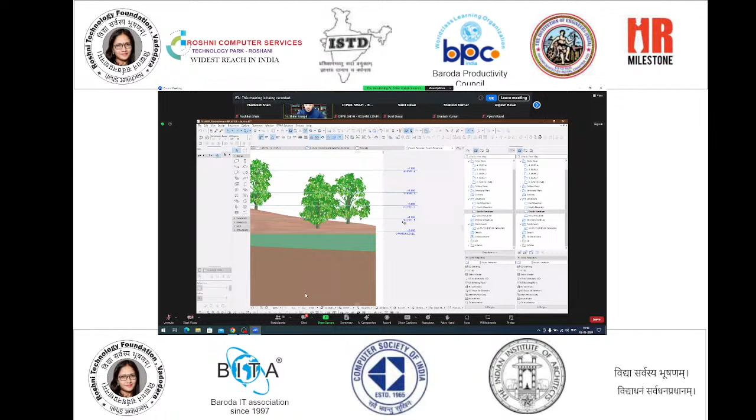So the first thing is when I select a tool, I'll get different properties to set up. This is where the slab part starts. I'm going for a wood floor right now as part of the model. And I'm going to give 100 mm height and also 100 mm from the floor plan. I can also define whether it is load bearing or non-load bearing, so I'll do that as well. I'll start with the rotated rectangle method of drafting.

So we created a slab. We will also check the same thing in 3D, and you can see there is a slab floating. Don't worry about the structural part of it because we are just initiating here. We are going to have the same thing in level 2, and in level 2 we will have this structure, so I'm going to model that as well.

So we have a room space. From the same space, I am going to add a couple of geometries to this. As you can see, there is a segment here, and also there is a segment here. And we can add another segment from here to here.

If we need any kind of references, the ArchiCAD software also lets us get that reference to work with. Now you can see it is not overlapping and it is not the right reference. Reference is something that we usually need so that our model gives a precise output. So you can see something that I can now remove. That is also there as part of the modeling aspect.

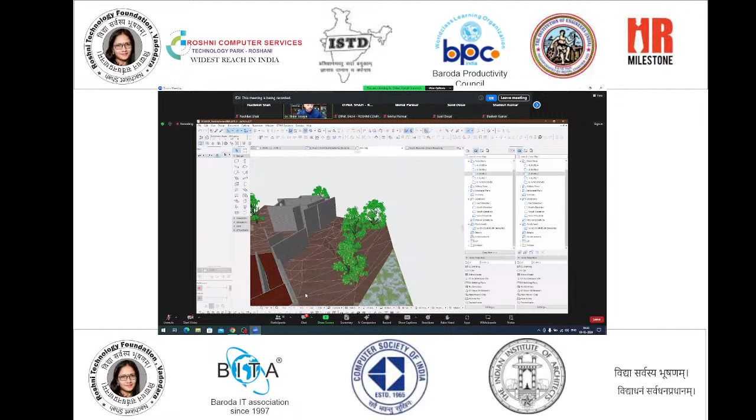Same thing, I can do it here as well, where these walls, which are made on level 2, I can either go completely into this floor itself, or I can take off the level reference and then take these walls and adjust them here as well. So here the advantage is that whether you work in 2D or in 3D, you are getting the update in the other place. That is one big advantage that we have here. So let's see now, yeah, that is also updated. As you can see, an update has happened, and this is what we have right now as part of the model.

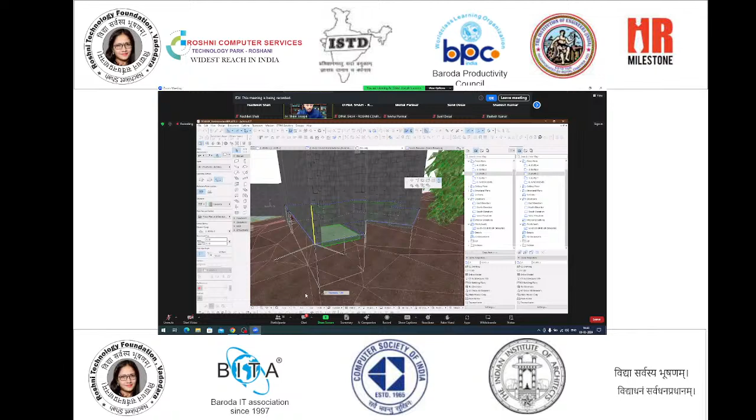Now, a small update I'm going to do: instead of having this as a wooden floor, I'm going to have a reinforced structure, or even a concrete one, and then I can edit directly if I need the slab thickness to go below earth. So that is also something I can easily do here.

Next thing is that on the ground floor, the bottommost level, there is a tool in ArchiCAD called the curtain wall tool. So I'm going to take the curtain wall tool and make that. The curtain wall tool helps us a lot in terms of making different types of facades. We can either go for a continuous one or a segmented one. So in the design, I'm going to take something like this. That would be better.

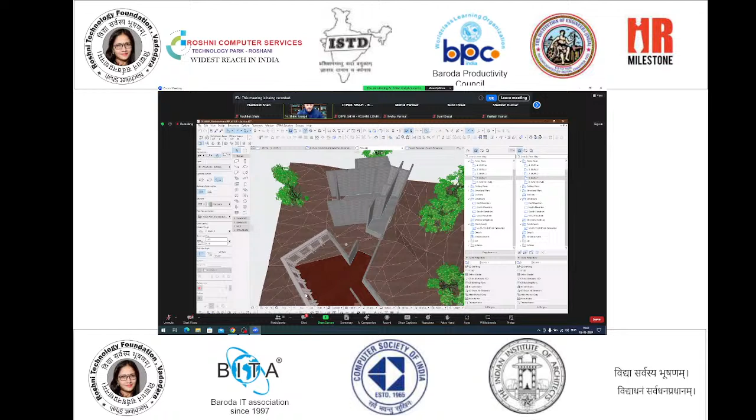So yeah, we have a curtain wall. That we can also set up. Right now I have kept it to 3 meters and we can see. And now you can see the site mesh is coming on top of things, right? Such things we can easily edit in ArchiCAD. For example, I can just select these two slabs here. There is a tool in ArchiCAD called Solid Element Operations. So I can keep this as the operator and this as the target. What this does is whatever is above gets cleaned, since I'm using upward extrusion.

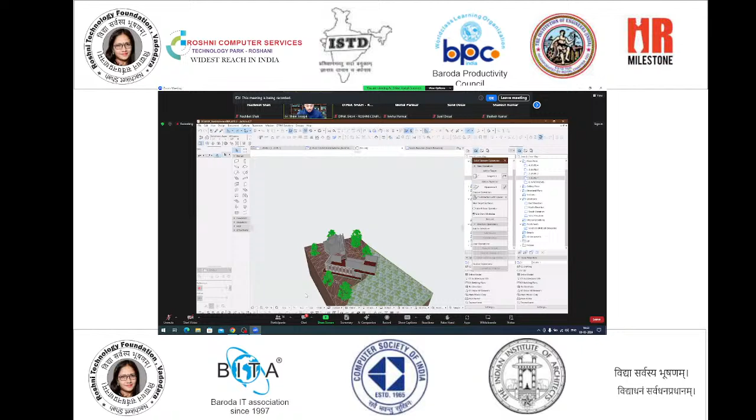So we will have a cleaner model with this. So this step, and then next thing, let's say I need to populate this with doors and windows. So what we can do is right now, if you see this curtain wall, it has a specific pattern. So I need to put a door on this. So instead of having this pattern, let's say if I need to have some other scheme for this. So I'm going to edit that.

So I'm going to take the base one, remove it. What I'm going to do is I'm going for a 2.1 base segment, and on the top of that I'm going for a 0.8 height. So there are two panels horizontally. I'll remove one and I'm going for a 1.2 meter width panel. Also, if I want to edit the panel size and everything, I have the option for customizing each and every part of this curtain wall. So that is an additional feature that we have.

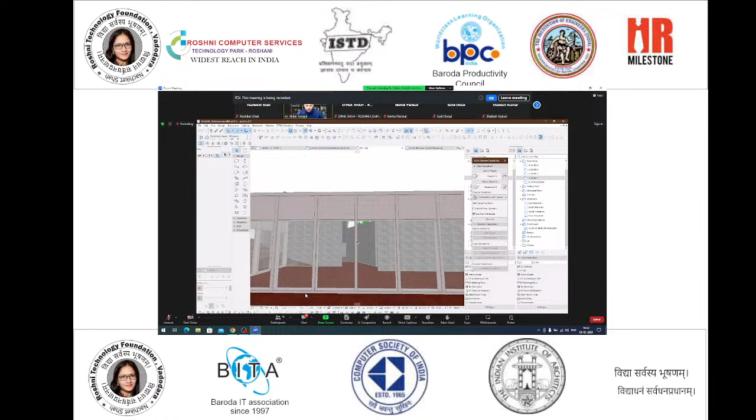And now you can see the curtain wall has been updated on the basis of how I have modeled it there. I'm going to elevate it up 0.1 because our slab is actually elevated a little bit up. So yeah, we have curtain wall also. Now, as part of the design, I have designed to have a sliding door for these two panels. So when we do that, this is one of the way of doing where we can just remove a mullion and then we can add a door completely here.

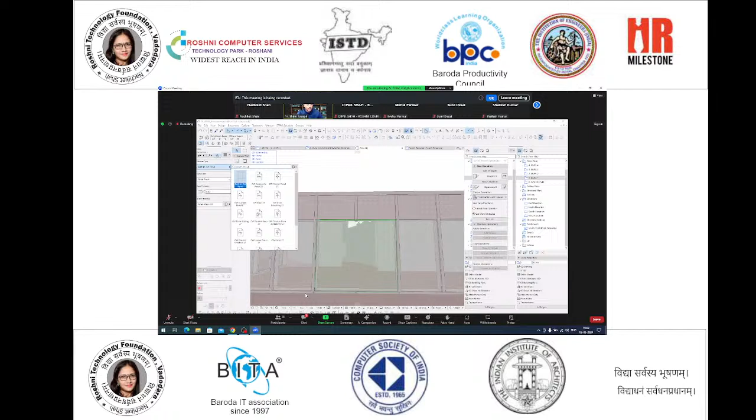So I'm going for a double sliding door. Let's say this, and then I'm going to open this as well. So you can see I have created easily a presentation, and also it is going to represent the same thing in the plan because we are using a sliding door, and you can see the representation already updated here.

Some of the other thing that we have is on the upper floor, we have a couple of doors. For this room, let's assume that the door is going to be here or here. So ArchiCAD also comes with a set of doors and windows. So what I'm going to use is I'm going to take one of them and I'm going to use this. We can also select and keep some of the elements as favorite. So you can see there are some tools that are already kept as favorite.

So I'm going to use a door of 0.9 by 2.1. So I'm going to use that here. Also another one here. Now this is going to be attached to this specific floor. So I'm going to use one more door, which is for toilet. I'm going for a smaller size. So I'm going to open it in this way. As you can see, I can control how it opens as well.

So I need to have another door here, which is folding and sliding. So that is a part of design that we have. So we will go to the library here. Like you can see, there is a large library already. In this, I'm going for a sliding and folding door, but I need a 2.5 meter width. This, and then I'm going to place that. Yeah, according to our sketch, it's almost correct.

Forgive me, there is a small delay. Yeah.

So I'm going to draw it from here and let's see how it is. Actually it's supposed to be from this side, but we can change the point anytime, there's no issue. You can see without a landing, I need to remove two more stairs. So instead of 20, I'm going for 18. I'll stop it here, add a landing from here to here, and then continue with the flight.

So you can see that one stair with the numbers and everything is added. Once we remove the image from the background, I think it will be easy. Now you can see I just deleted the image, but I'll get it back. So we have a guideline here which is disturbing us, we'll take it out, it's not required.

So that is, we have right now an element here, and I'm going to make this as well part of the model. I'm drawing on the top. Why? Because I have decided to cut this instead of doing that. So if you want to do such kind of activities, that is also possible, we just have to define which axis.

Now we have two different walls in this. Also there is a stair which is going up, so I'll take the stair tool. Also I need to define what actually this dimension is, so I'm going to check that as well. So it is 1.82 width, and it is going to start from level 1 to level 2.

And I'm going for adjusting the height, 1.82, sorry, 1.82. We'll confirm it, yeah, so 1.8, yes.

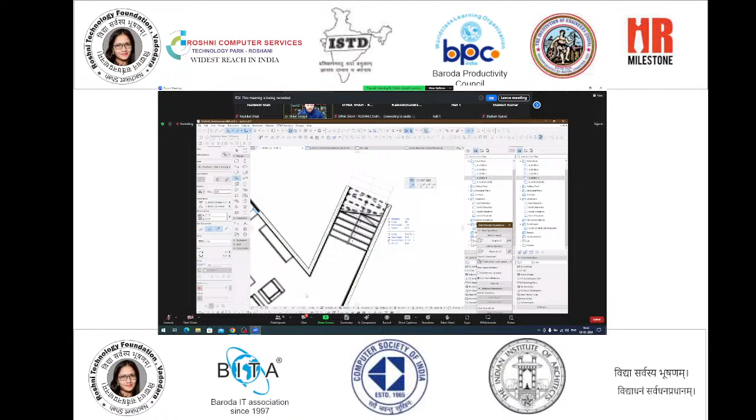So here it is going for 10 steps to climb to that level. Let's see it there and try to edit it in 3D also, that's how we will try to change this. So let's check what we have done. Here you can see we have created a straight flight, and there's actually two landings happening, which we will edit later. And here there is an additional stair that is happening, which is connecting.

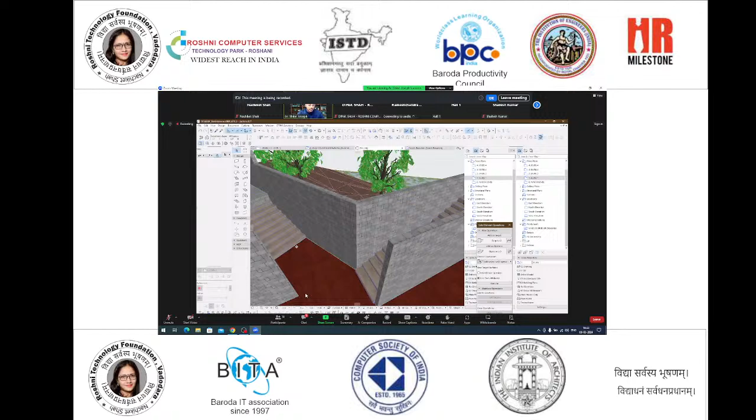But in this design, imagine I am deciding, instead of 10 numbers, I'm going for 8 numbers. You can see it updates and corrects the model accordingly. And we'll get back to the floor plan. So that's how it is to create models and designs easily. We're going to edit this also, just in case we don't run into any errors here, but we are avoiding that as much as possible because we are working with a time limit.

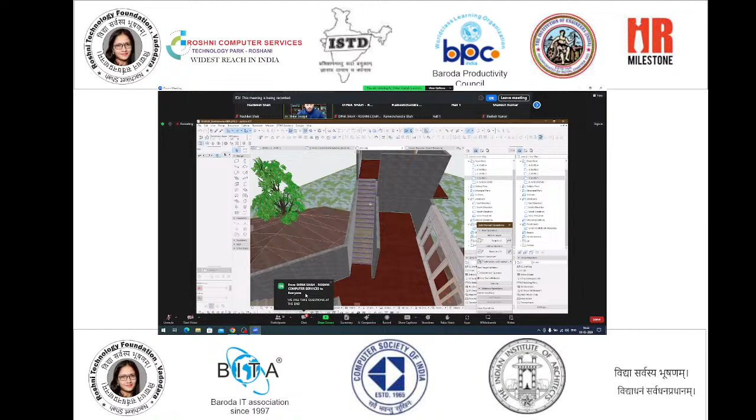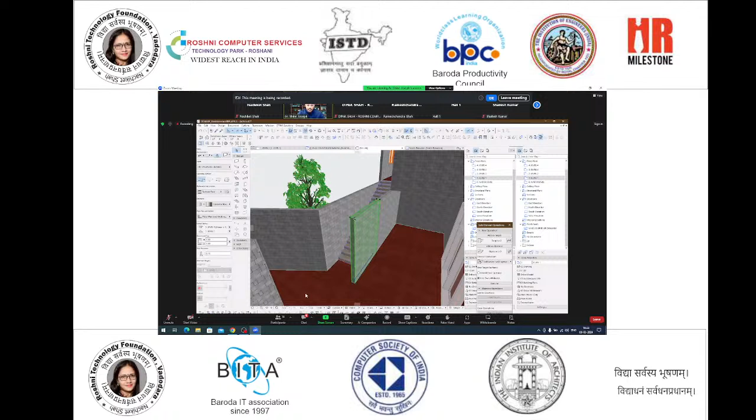Yes, so this will be a shorter and better stair that we have. Now, as part of the design, let's say I don't want this wall to be straight, I want it to be cut into two pieces, where that is something that's part of the design, we can do that. Most of the design that we do comes when we see things in 3D, and then we decide, okay, this is not right, I can do something else instead. So I'm going to reduce this, and you can see, yeah, it looks much better. So that we have done.

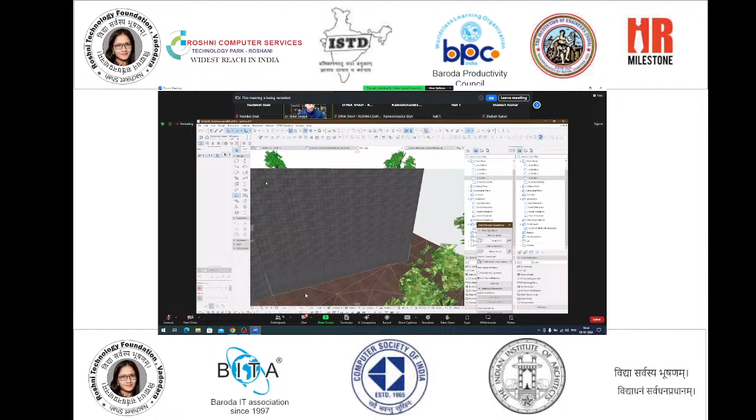Also, as part of the design, I don't want a big huge wall, I have a water body on the side, I don't want it to be like this, I want it to be much better. I want to have a circular opening instead, so that is also something we can have. I'm going for a 1 meter diameter circle, and I'm going to place two of them, so I can place one and then make a copy and place the other, that's also fine. I found that this is small, so I'm going for 1.5 meter, and you can see it looks much better than the previous design.

So as part of the major structure, sorry, the major frame of the building is kind of done.

So what we will do is we will start with the roof. For this part, I'm going to decide to have a roof that is sloping towards two sides. So we are going for the roof tool in ArchiCAD. There is also something that does the calculation by itself.

So I'll go for two side sloping, and then I'll take the rotated rectangle method. I'm going to take this as the reference to create that. You can see it automatically created a roof in plan. Let us go to 3D and see how it is.

So I have done the projected part, and you can see I have created a pretty looking roof. We can adjust the slope and everything. Right now it is going for 30 degrees. If I wanted to have 27, that would be better, I feel. So I have changed the angle as well, but this seems pretty simple.

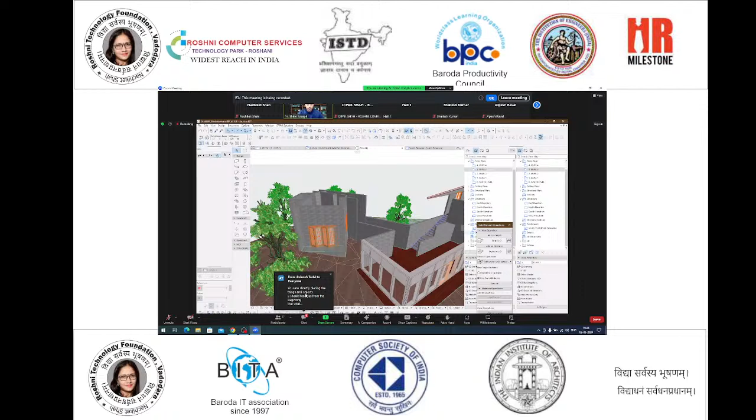So we will go for one more of the same for level one, and then we are going to adjust and create a complex roof for this. For this room, I need to see the reference which is on top. So I'm going to refer to the third floor, and you can see right now I can see the third floor easily here. So the reference I'll be taking will be from here. Okay, let's take it from here.

And I'm going to use this as a reference here. Or I can even take this part of it and create the model. So that is also an option that we have. It depends on us how we want to do that. It's part of the design, so we can improve it anytime.

So I'm going to place it. It is telling me that it's on top of this floor, so we'll be able to see a roof. Right now it is using this, but I think it would be better to have the roof in the other direction instead of this. So let's have the roof removed. But I think you're getting the idea of how we are getting into the design, the nitty-gritty of this design, and how easily we can edit it.

So I'll go back to the same method. I'm taking a couple of reference lines so that it will not make any errors. So I'm going to place it till here, continue, and then let's see in 3D how it is. Yes, we have created the roof.

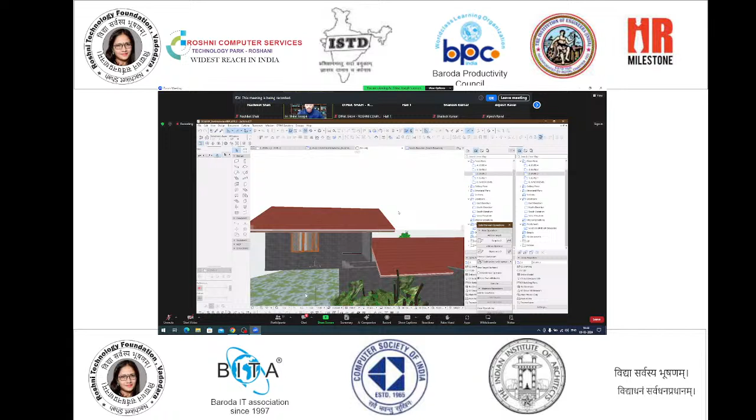So now this wall, as you can see, part of the design, it's not right to have it. So we need to have another wall here. You can either stretch the wall or create a new wall altogether on top. There are different ways and multiple ways of achieving the same goal. So that is something that we have here. We can see that has been created. I'm not going to close this right now, let's see what we can do as part of the design.

Now the most important thing is that when we work with a complex roof, for example for this, if I need to build a sloping roof, it is going to be really difficult to model a roof for such kinds of shapes. So what we are going to do is make it a little bit easier and not so complex. We will not waste our time making the calculation, we'll let the software decide how it is. So we are going for a complex one.

And I'm going to just draw the profile of the roof. So it goes here, here, here, here, and it's a small piece. And then I'm going to take it till here. So we need to do a little bit of adjustment for the roof, and I'll get back to the first point. Now it has created a roof. I think you'll be wondering how it is going to look in practice, so let's see.

So you can see we have created a roof here, which is complex. What I'm going to do right now is, like the previous design, lift it up to 3 meters - right now it is at 2 meters. And you can also see the wall is going up.

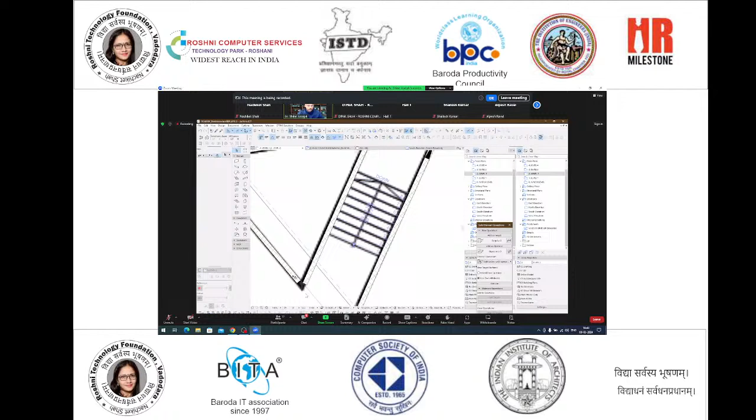I'm going to add another wall here. As you can see, it's taken from a very basic image and there is a time limit, so I'm not focusing on the precision of it, but we can edit and change anytime. I'm considering this a conceptual stage of the project, and right now all these changes we can easily get back and adjust.

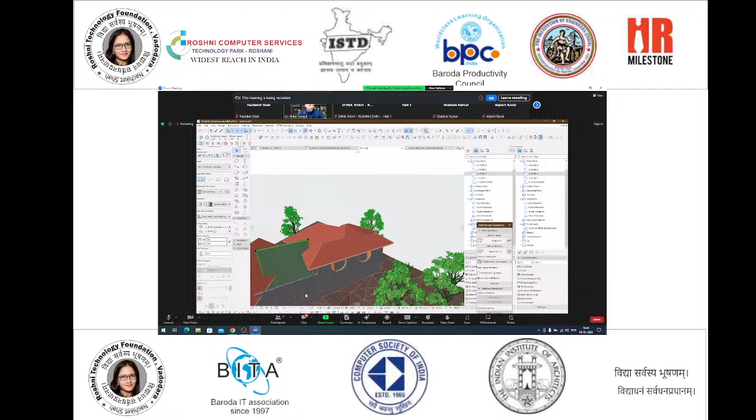So this is going up, and I need to fit it to this. When we speak about any of these softwares, one of the things you should know is there's a language called parametric language where it understands where it is linking to - so the software knows that part of it.

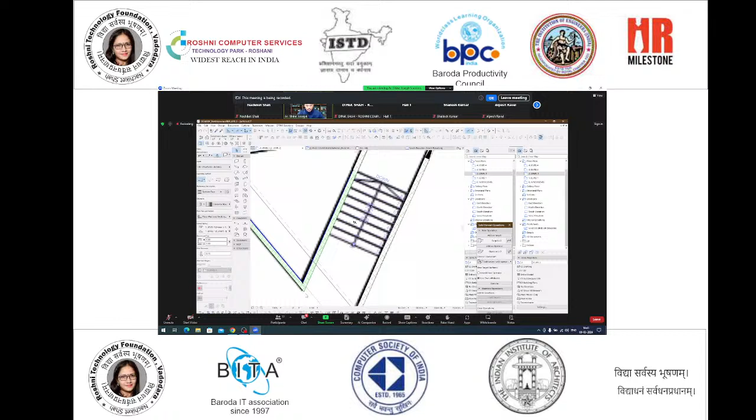So you can see in this area there is no roof, so if I need to add that there's also an option to do that. When we have this plus symbol, similar to how we saw it before, I'm going to take this part of the roof, and you can see in plan and also in 3D it is going to be updated - so we can do that.

Right now I'm not going to keep it. We can do however we want to have it - even if you want a slope or a flat roof, we can do that. So this is what we have created so far.

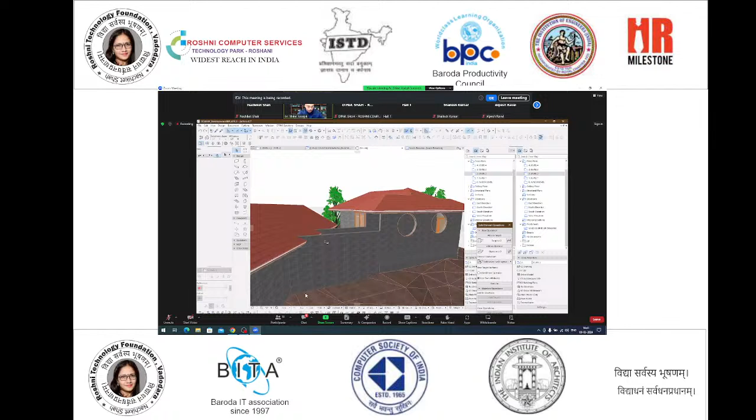As part of the design, this is an open area, so I'm going to take these two walls and keep the wall height only till level 2. And this wall I'm going to take only till here. You can see I've created a little bit of detail here.

When it comes to adding furnitures and details, that is something that gives life to our drawings or to our design. Right now I have decided the kitchen will have a cooktop, a sink, a tall cabinet, and a fridge - so this is the pattern I'm going to use.

This is a very small space, so I'm going to take it a little bit to this side. I'm going to improve the design over the period of time. So the first object I'll be using is the kitchen object.

You can see there is a large library, like I mentioned before - for furnishing, windows, building structures, under furnishing, appliances, bathroom accessories, beds, chairs. The library is huge, I don't have to worry about whether an item is there or not because most of the things we need are already there. So if I go for just kitchen items, I'll get it directly here.

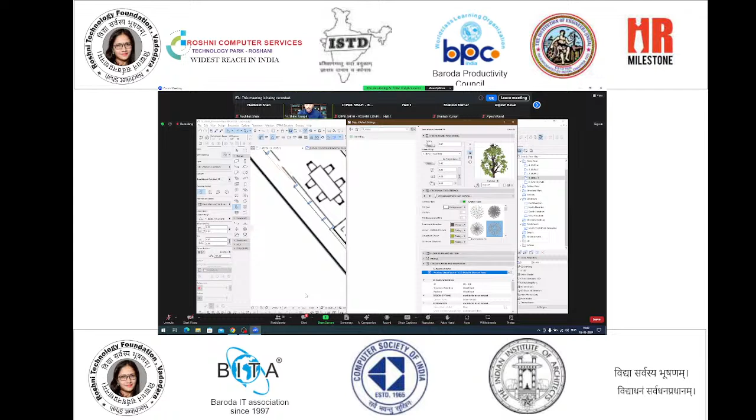I'm going for a kitchen layout - I'm going for a U shape. Here I can set up certain dimensions, like this is right now 2 feet high, 0.6 meter. Instead of that, if I need a different dimension, I can set it up.

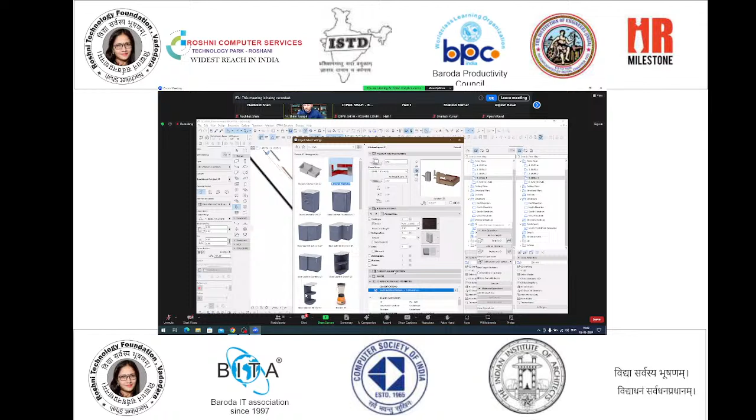So I need one tall cabinet and one wall cabinet - multiple properties they have. I'm going to avoid dishwashers, washers, and ovens and such details, so I can remove those. Once it's done, I'll give OK, and then place it randomly - you can see it comes with this. I'm going to place it here, do a little bit of adjustment here and there, and I need it from this element.

And this is going to be somewhere here. Yeah, this is going to be good. And then I'm taking this. So what you are seeing is a wall cabinet. So I'm running it all around. I'm going to stop it here. So this was our tall cabinet. So I'll place it somewhere here. Right now, I'm not worried about the position. I'll approximately keep it so that we can showcase how it is coming.

And then I have a refrigerator. So the refrigerator right now is using a specific standard. So I'm going to readjust. This parametric property is that I can easily adjust, so that is something that you have to observe when I'm doing it here. So the cooktop, according to the design, is here. And also there is a sink which is going to come here. So right now this does not have any windows. So I think adding a window would be good for this location.

Now we'll do the edits in 3D because we'll be able to see much better there. So let's see what window we have placed. So here I'm using an asymmetric window itself. So this is how it is right now. But if I wanted to have a symmetric or uniform character, it is going to take place according to how we design. So like I mentioned, the parametric aspect, it's in your hand. So we can easily do that. So right now, if I go for a mirrored one, it is going to be mirrored for the first element. So the same thing is going to reflect, and you can see it has been updated here immediately.

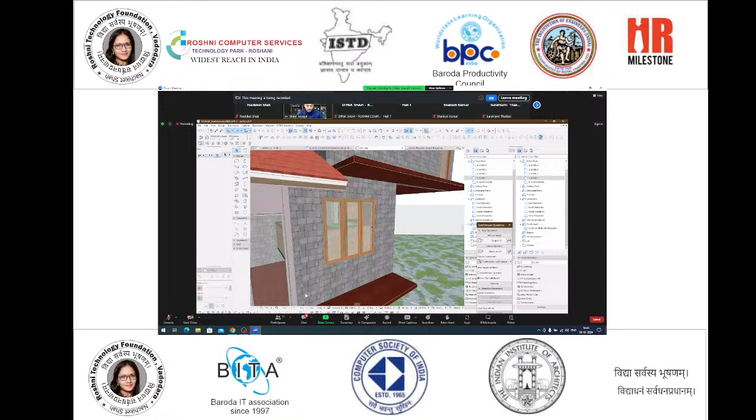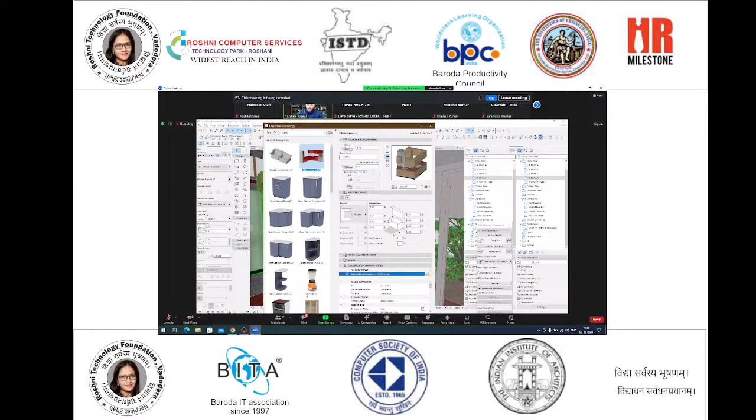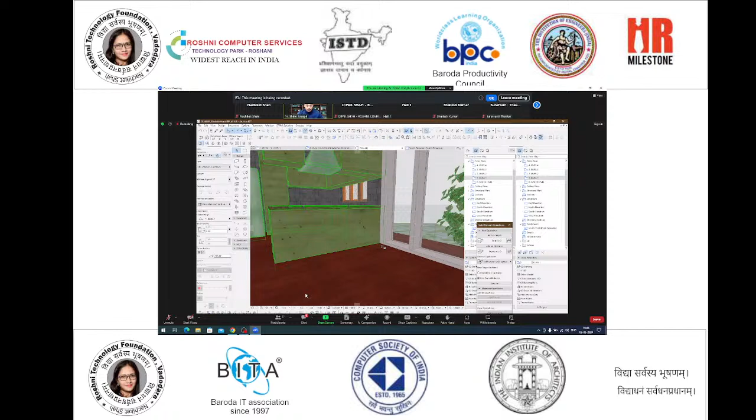I'm going to the 3D and I'm going to see where it is. So right now it is placed a little bit up because we have connected to a different floor. So that's what I was talking about, the parametric character. We need to define exactly where it is supposed to be. So if this floor is supposed to be at level 1, mention it level 1. And if it has a specific height, you mention that. So I think it went a bit low. It should be... We'll edit it directly here. And 0.1 now. So yeah, we have added it there. So there are no issues.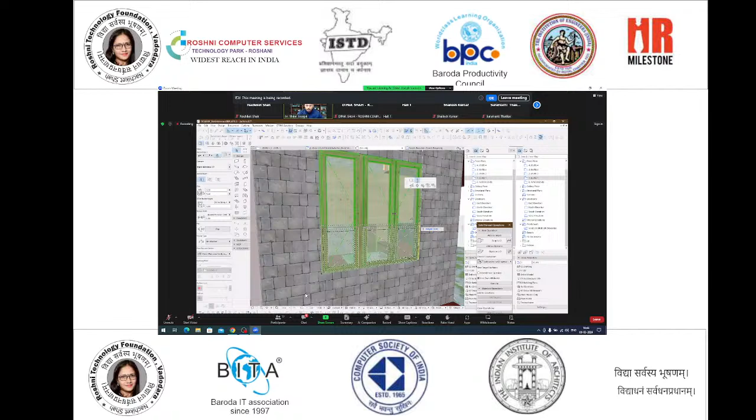Yes. And then there is a wall cabinet coming here. So I'm not looking for a really tall window. I'm just looking for a small window, which is going to just help us glimpse outside. So yeah, we have that as well. So this is what we have created. Right now, there is a hood that is going up. If we don't need that, we can remove it. So I won't be spending much time on this particular topic. So it's the parametric aspect of it, like I mentioned, I'm controlling that however I want.

Similar way, if I'm going for a dining table, I can decide whether I want it on both the sides or not. So I'm going to place it. I'm going to take it from here, adjust it to this. And you can see it's already a 6-seater. So if I stretch it, it will do the calculation by itself. And depending on the space availability, it will give you how many seats you can have.

Similar to that, we have a sofa set we are going to add here. So we will search for sofa. And then in this, like you can see, we can take a sofa model. And I'm going to place this. So I'll give 0.1. Also, this has been elevated a little extra. So I'm going to rotate this 180 degrees. And then I'll place it here. Also, I'm going to place another one here. Like I mentioned about the parametric character, if I make it small, yeah, right now we have it.

We are going to go for a coffee table. So let's see, you can see there are multiple models already there. I'm just going to take one of these and then make sure it is on the right level. And then we are going to place it. Yes, we have 0.85 by 0.85. But anyway, we can edit it and update it at any stage. Also, I'm going for a single seater sofa this time. Let's see in the library, yeah, something like this I'll use. Yeah, this would be much better. So don't worry about the appearance or material or anything. That is also something that we will be looking at later.

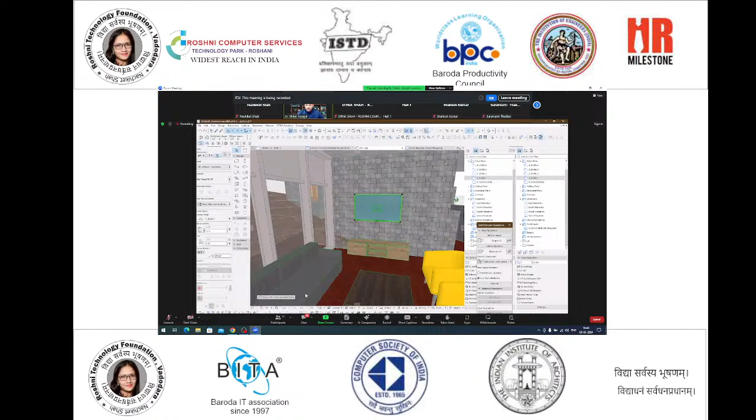If I need to have a specific width, like if I'm going for a 5 feet TV or 60-inch TV, we can do that according to how we want it. So I'm going for 1.5 meter, a little bigger TV. I can edit it in 3D also. I can assign it depending on the model. Yeah, it's in our hand. We can just do it on the basis of axis. Right now, because our building has a slant, I think it is better to move it in plan itself.

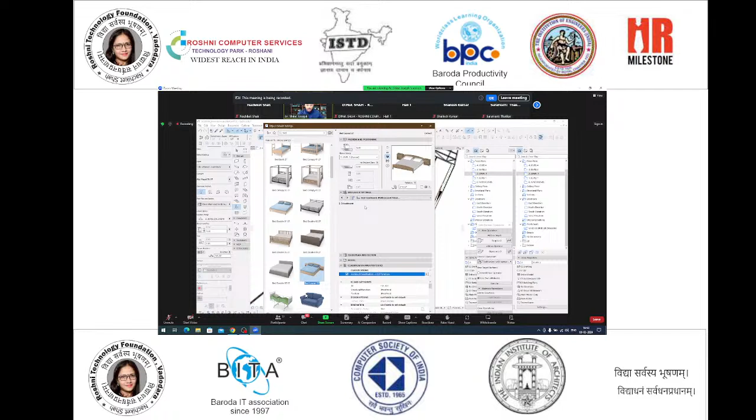We'll go to the next level where we have a bed. So we'll populate that also first, because we have almost 18 minutes more. So we will go with a bed that has a side table. I think something like this would be better. So I'll go for adding certain details. I'll add a pillow. I'll control the headboard to be something like this. And once I place it, I can just arrange where I want it. And you can see I have a bed. I can adjust the size of anything, there is no issue for that. So I'll keep it to that.

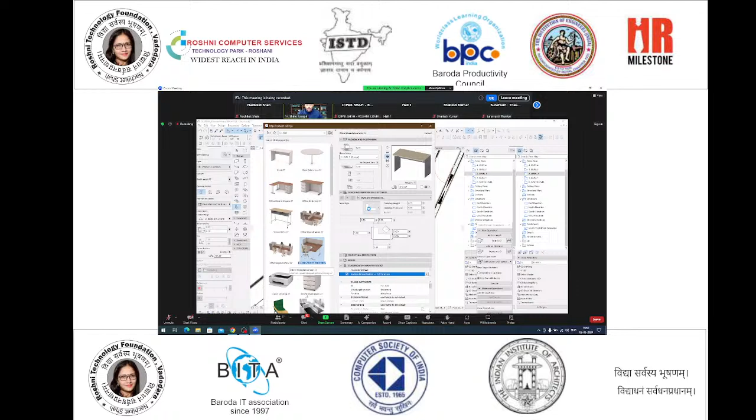So now I'll go for a study table. So we'll go for a desk, and then we'll take this. We'll not worry about a chair. Okay, if we want to, we can do that. We can set up what type of shape we want. So we'll get a model like this. And if you don't want the front panels or anything, we have the option to remove that. And we are immediately getting the result.

So this helps us do the model and documentation detail. As you can see, when I'm doing the model, I'm getting the 2D, the 3D and all the details directly. So that is a main advantage. I'm going to put the chair a little inside so that it will be safe for the person to walk. Also, I'll add a wardrobe. There is again a large library of wardrobes here. Okay, typed wrong. Yeah, so in this, you can select something. I'm taking something like this. I'll place this, rotate it, and then I'm going to place it here.

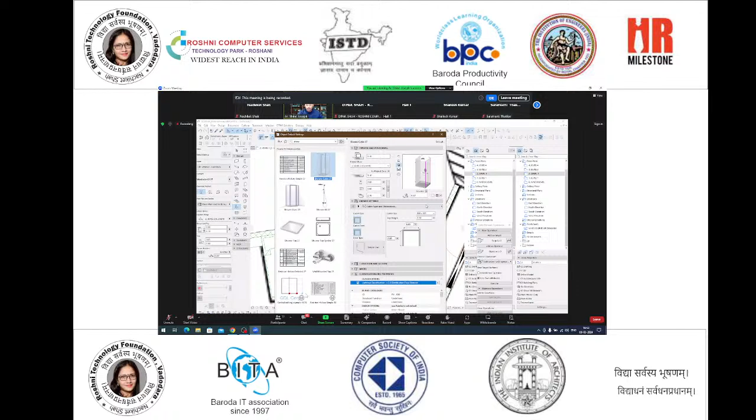So we are almost done with our furniture. So we have something like a shower. We can go for a shower and then select the type that we are looking for. You can see it gives a preview of what we are trying to do. So this is something I'll be using, and then I'll be placing this.

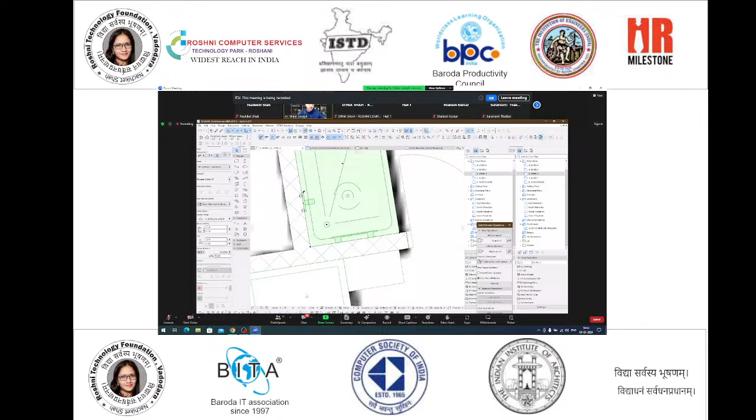Again, it comes with the pipe junction positions, so we can easily do the plumbing drawings directly here. Like you can see, this is where the connection is. But if I want the connection to be somewhere on this side, you can see it automatically adjusted that aspect of it. So it helps us. If you're saying this pipe has to come out, I can just take the pipe outside easily and start doing the MEP model as well.

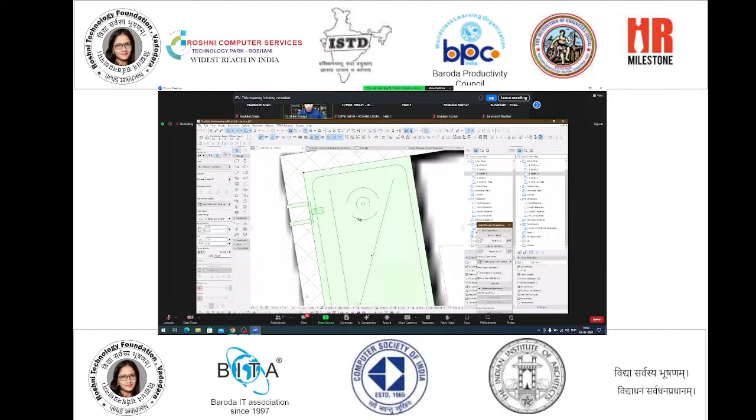So to finish that, we will get some additional details like WC. WC is also something that is really nice to edit. You can go for a floor mount or a wall mount. You can control what type of flush you're looking for. It automatically gives you the update. So this is also an MEP element.

I'm not worried about the technical aspect of this toilet; as you know, there will be a lot of issues if the model is not right or things like that. But that is not what I'm focusing on right now. I'm trying to create a model and show you how easily we can get the data. So I'm going for this, small changes here and there. Yeah, so now it is a clean finish there. And so this part is also done.

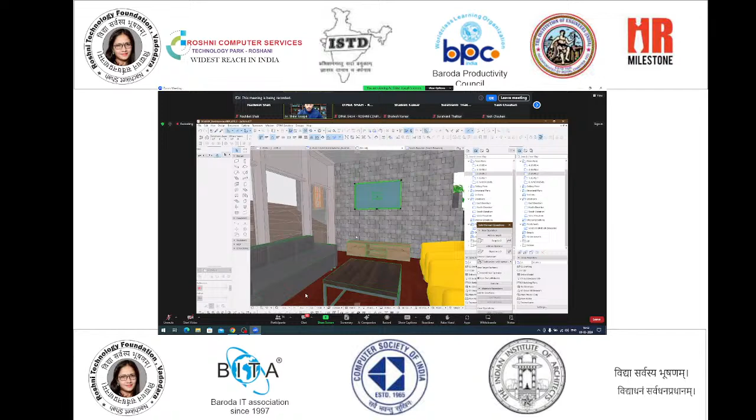So here you can see there is a little different type of stair that we have. So I'm going to go to 3D and check how much height there is in that place, and then we'll try to create a stair specific to that height. So right now it is going a bit up. So it's almost 1.2 meter. So like I mentioned, it is really easy to create even a weird shaped staircase.

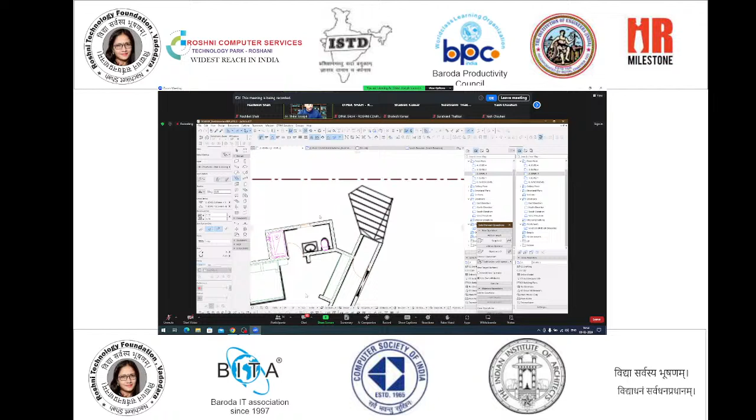So what I'll do is go for a flexible height, not linked. So I'm going for 1.2 meter, and then width, I think I should go for 1.2. Let's see with the 1.2. I'm going for top to bottom this time because it is easy for me to draft from here to outside. And I need to change the direction. And so now I have a stair. So you can see I created a stair.

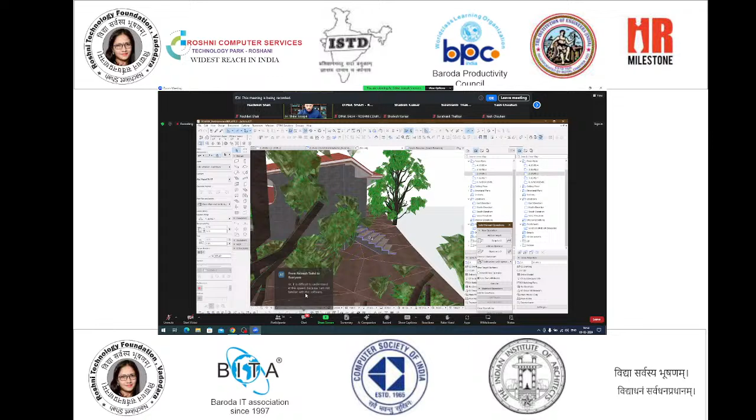Now I am changing the profile to adjust it, because as part of the site, there were contours that were making some issues. And you can see even the profile can be adjusted easily. So if I get back to 3D, I may have to adjust the height. So you can see it is right now merging with the site. So there was a little bit of height that I was supposed to make. So yes, we have the stair that is coming.

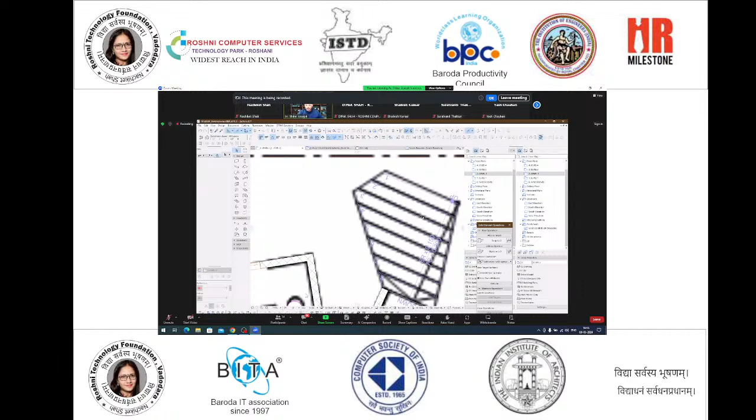Again, you can make it curvilinear, you can make it much more fancy and do it easily. And you can see there is also numbering, and the riser height and everything is already done for you. So we have this floor as well. On the topmost floor, we have only 2, 3 furnitures. We'll finish that as well.

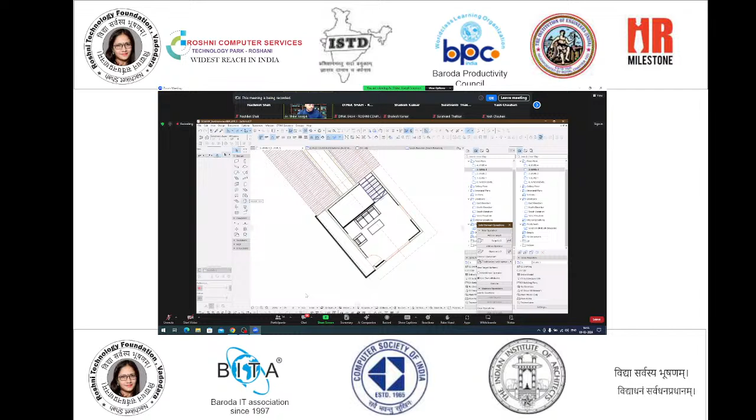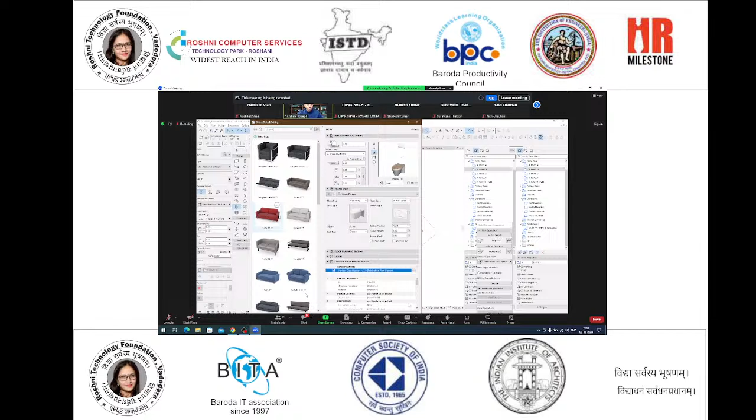So I'll take the tool here, and then in this, I'm going to type sofa again. Again, copy from the previous one, but here I'm going for a sofa set itself. So there is a sofa layout where I'm going to keep it on one side, but not on this side. Something like this, it comes with a table as well. So you can see, this is how it is. There is a little bit of rotation required. Yeah, good.

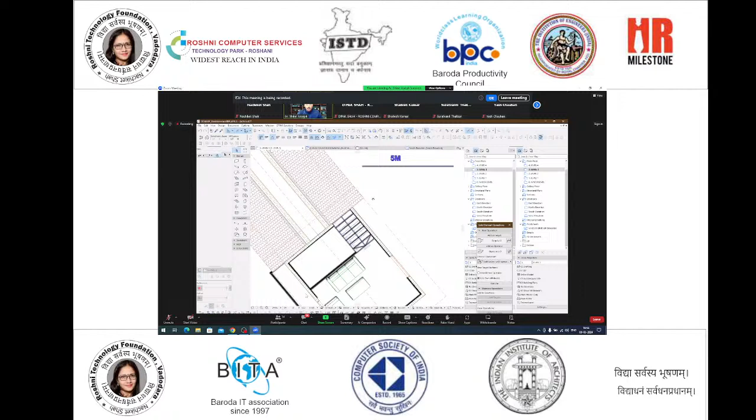So that is also something we have. We have doors, windows, and everything. If I want, I can just add a window here as well, to let the house breathe. So we have almost everything done in terms of our model. The only thing is the structural aspect of it. There is the possibility of importing structural details. Otherwise, we can completely create them.

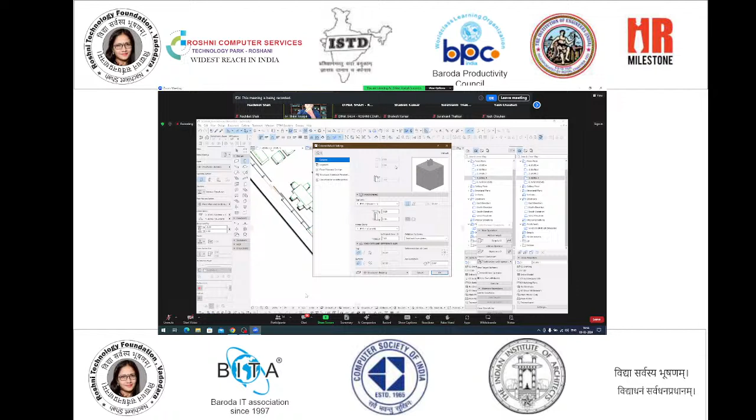So what I'm going to do is make a column. I go to the column tool in the settings. So right now, this is something that I'm going to look at. Instead of a simple column, I need a base that is standing in the ground. It's just for the project I'm doing. And on the top of that, I'm using an I section. I'm using a flexible height right now. So this is what you're seeing.

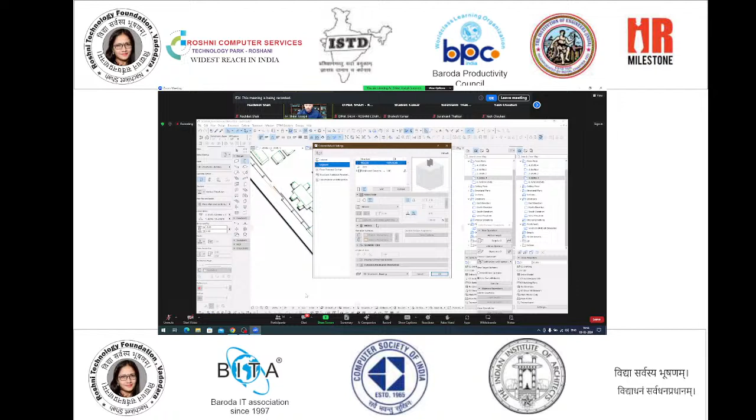So the base is an RCC material. What we have is the base. We'll take it as rectangular, and I'm going for a reinforced structural. So you can see the base is reinforced structural. You can add the plate and all the detail here, but I'm not going completely into this. So this is a specific cross section, which can again be customized and detailed. I'm going to give load bearing as the structural property detail.

And I'm going to add this in this level itself because I need to support those two parts of the building. I'll add 4 columns probably there, but I need a reference of level 2 or level 3. Level 3 would be better. We can see easily here.

So you can see that there is a projection of a wall. So this is where it would be preferable to add. So I'll take the column here, and you can see it comes with all these details. So I'm going to take it to this, and I'll give it a rotation. And you can see the column is right now sitting. Don't worry about the sizes or everything. We can customize even this aspect of it, like you mentioned.

In this, we have the option of going through each and every detail of it. Like it is using an I section of specific detail. Again, we can do that. So I'm using one here. I'll also add another one. As you can see, I'm looking at the reference of what is there below and working with the same. So I'm going to make 2 more.

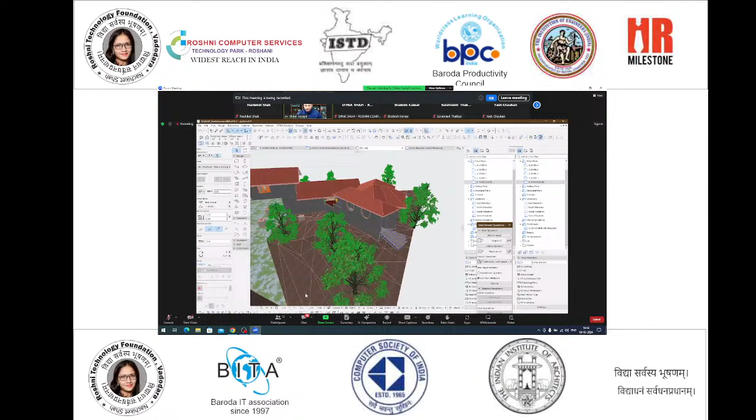I'll take from here and I'll place it somewhere here. Or let's say I need to multiply. So I'm going for the distribute option. I'm going to have two copies of this. So when I start from this to this, it is automatically distributing between these two elements. So I'm going to keep it somewhere here. Now, if I get back to 3D, this is what we have. We have a couple of structures here.

So now either in 3D or 2D, if we have a structural engineer, always better, we can do the customization, and we can see it starts to form how the building is going to function. So this is the column part of it. If you want to specifically look into the beam aspect of it, that is also possible. When we have the column, we can again go for a beam. We can customize if it's your I section or a completely different item itself. We can do that also.

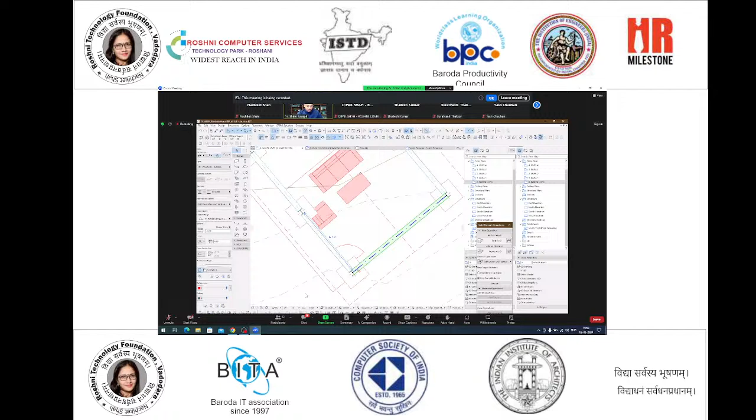So I'm going for this. I don't want the reference, so I'm pushing the reference back. So I'm going to take it here. And I'm going to take another one to this. And it's equal. You can also multiply like the first method that I used. It's up to us how we want to do that. It will help us accordingly. So I'm going to place two members here and here. I'm going to take this. Just keep one here and one more here.

So I won't be going much into it. There is a different model similar to this project that has been done. I think it will be easy for me to show directly here. So like you are seeing, it is more like a plinth beam that we have created. So I'm going to elevate it to somewhere here. And also we can keep a copy here. So it is going to support. So similar to that, we can again easily do a complete modeling of the same.

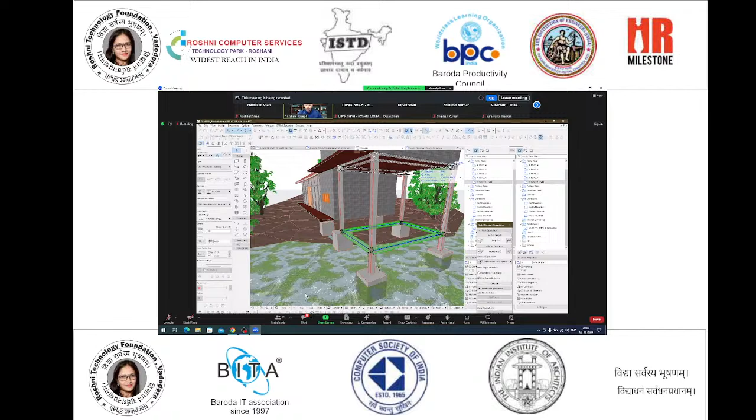So like you are seeing this column beam structure, if I want to work segment-wise, that is also possible. So all the columns in this project are already assigned as load bearing members, like you can see. Also, all the beams are specified as load bearing. If it is not there, we can also do that. This roof needs to be load bearing. So that is also something that we have to assign. So here it is, like you can see, it is a load bearing member. There is also an option to add additional detail.

So far what you're seeing is a complete model, even detailing the structure and the architectural interior part of it. Now let's say we make a couple of drawings of this. So when we have a project with multiple floors already created, now what I'm going to do is... Joseph, I'd like to interrupt you.

See, basically, so far, in order to do things faster rather than redrawing it, he has taken a raster image of some plan. And on that raster image, he built the 2D. And while he is building the 2D, it is creating 3D along with it. And placing furniture, kitchen components, or maybe your WC, everything is just parametric and you just have to place, stretch and fit it into the available space. Yes. So this is quite easy, and after creating the building, he added the structural components also.

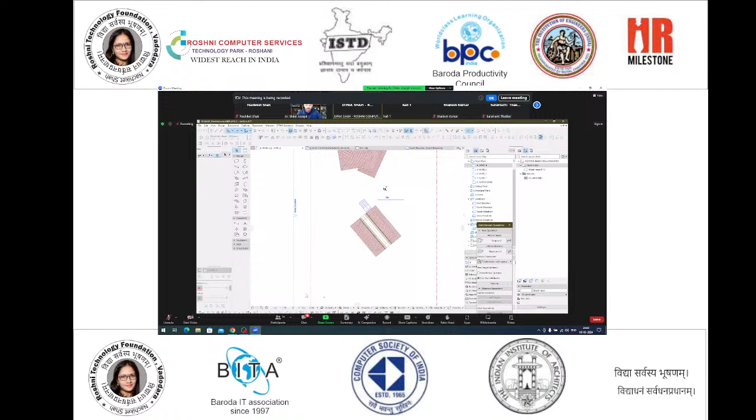Wait for another 5 minutes and have a look at how drawings are created. You can finish it off quickly, we'll leave maybe another 5 to 10 minutes. So we already have some elements prepared.

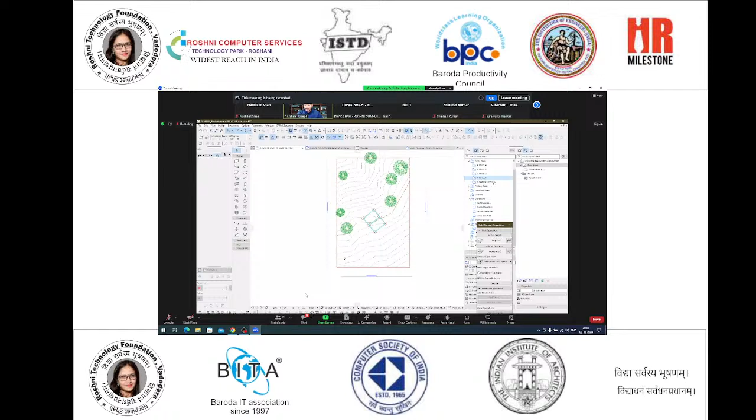You can see there is a ground floor drawing. As part of documentation, I'll add the levels as well. I'm taking the level tool and I'll just click. It's telling me it is plus 1.6 from the reference, and our reference is the water level, which is 0, and then it is going.

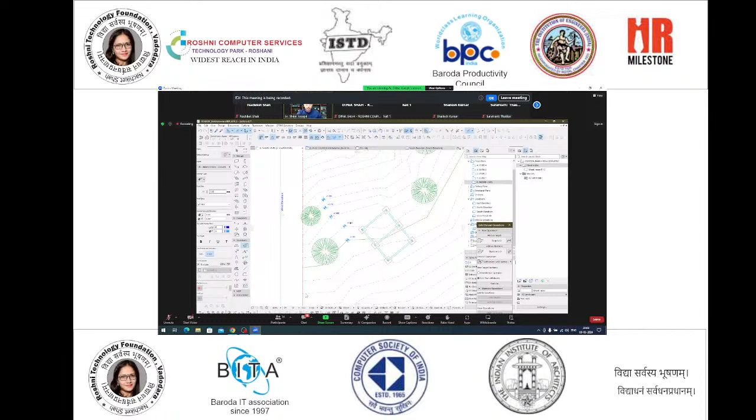Let me explain. If I click here, it's asking minus 0.2, this is 0.1, so 0.4, 0.7 - the contours are climbing up. So I'm clicking on it and it's giving me the volume back, and this is the water area we have. From that reference, we prepared the model. So when I click here, I'm automatically getting the height.

Let's consider the same thing here. You can see this is 3.1 meters from the base. Also, if you want to specify the roof height, that's also possible.

We can do that. As part of documentation, I'll do one automatic dimensioning only for this wall. I'm going to select all the walls here, specifically just the wall for now. There are different methods of doing this, and all these walls are what I'm going to use for documentation.

I'll take annotation - there is automatic dimensioning, I'll use the exterior dimension. I'll place it on all four sides and take it aligned to this axis because it will be easy for me to get the dimensions here. You can see it gives almost all the dimensions here. So that's one way of doing it.

I think it would be better to show it for a smaller scale of space like this, it would be much more efficient to show. I'll just take the walls of this. When we have so many elements here and want to focus on walls, there are again different methods of doing that.

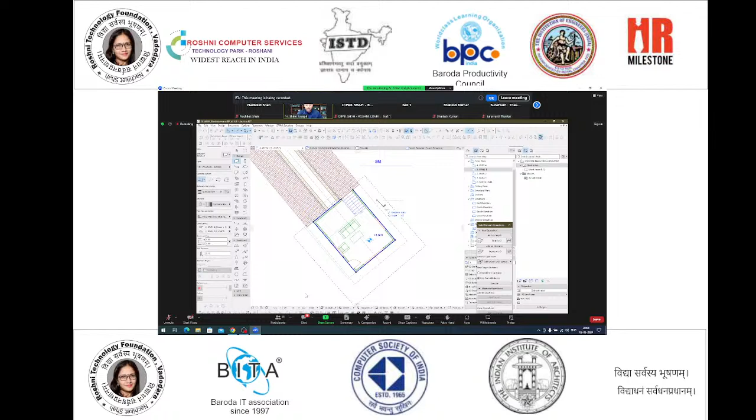I'll just take all the walls in this area, and now under document there is automatic dimensioning, exterior dimension. Similar to what I did, I can just place it and it's going to give the dimension I specify. I can specify these dimensions in detail, and labeling also it will do by itself.

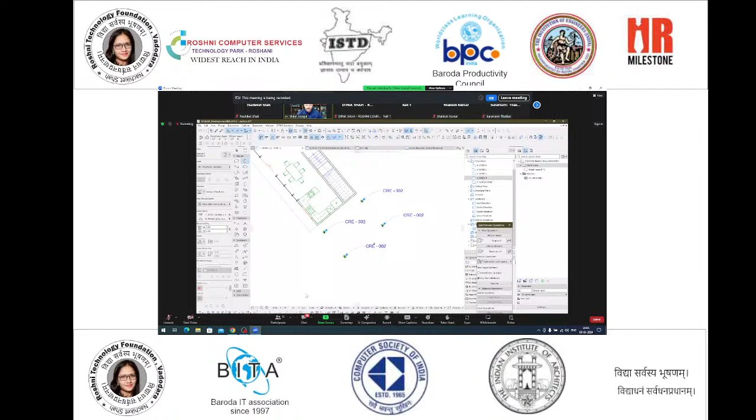So only for this one, I'll label all the columns. I can take all the columns in this project and do the labeling also for selected elements. Each column has an ID, that's what you're seeing here. If I change the ID of that column to something else, like C1, it's going to be C1. So that's what we have.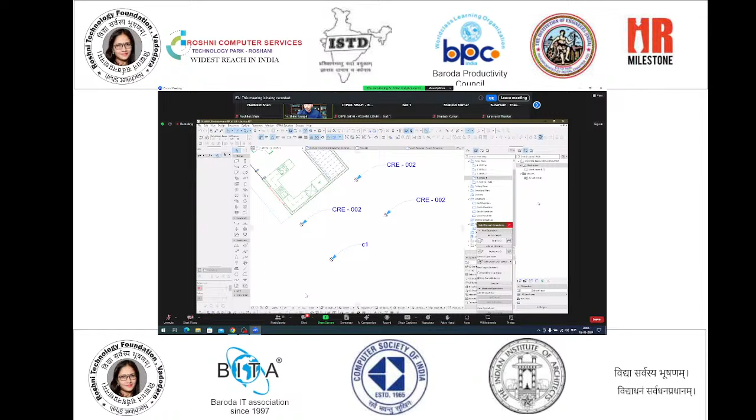So we have created a set of floor plans. Let's not focus on how good it is because we can still improvise the drawings however we want. I'm just going to drag and drop into this place, and it's going to create certain drawings for me.

Either we can just create a folder and within that folder give floor plans or something like that, and then we can have the place drawing option. When we do that, all these drawings are placed into this folder as a drawing with a master layout. So you can see this is one floor plan - only thing I have to do is adjust the limits of the view, like you can also refer to almost all the CAD drawings we have. So we can see it is adjusting to that.

So there is already this floor plan, and there is another floor plan here. You can rotate it, adjust it, make it a much more efficient drawing. It's up to us to create the drawing how we want. If you want multiple drawings on the same page, you can just drag and drop like that. I'll be focusing only on the floor plan here.

What I'll be doing is show you an additional feature, which is auto text. Right now, if you see this, it is showing me certain details like contact detail, project detail, and everything. Similarly, we already named this drawing level 1, so it is telling me the drawing name is level 1. Also, there is a date, which is an auto text here.

What I'll do is keep a date here and set it as auto text. Instead of typing the date, I'll just go for the auto text option and select what I want. There are so many things you can do with auto text, including the properties of it. You can see it is showing today's date as the auto text, so I don't have to go back to every sheet and do that. That's one advantage—now any sheet you go to, it is going to show that.

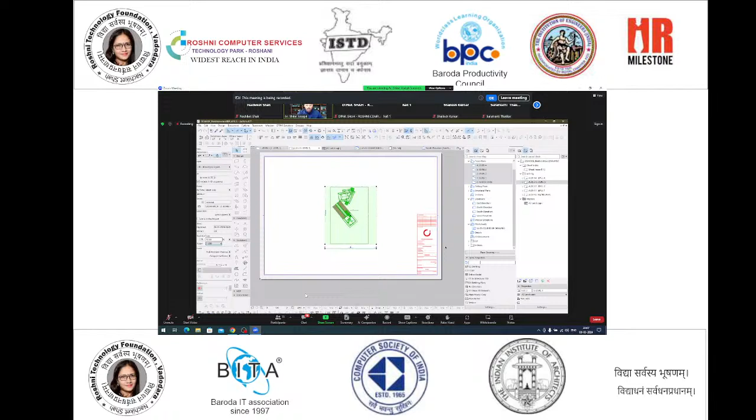Also, you can see there is a scale of 1:100—that's what the scale is doing for this. If I change this to something like 1:200, the auto text is going to update automatically to show 1:200. So it's an automatic thing.

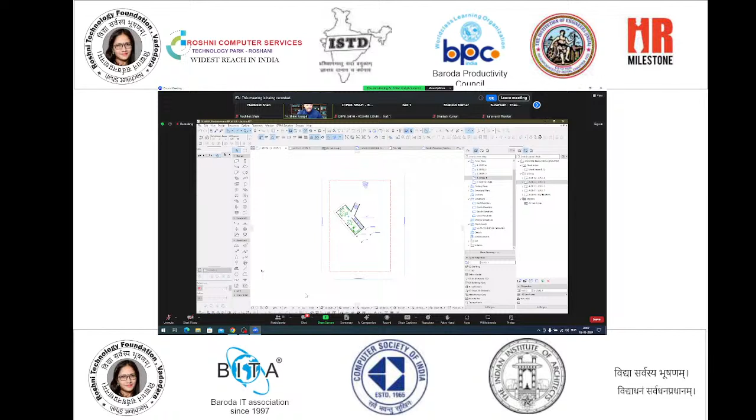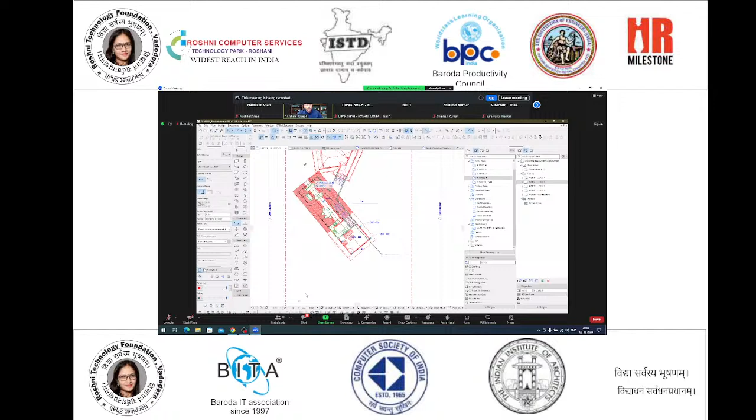I'll just show you one more thing, the section aspect of it. I just turn on the section. For reference, I'll take the section tool. I'm deciding to take the section through this stair so it will look a little better, looking outside to this side. So if I just take that, it is already named S1 for me and it is already there in the drawing.

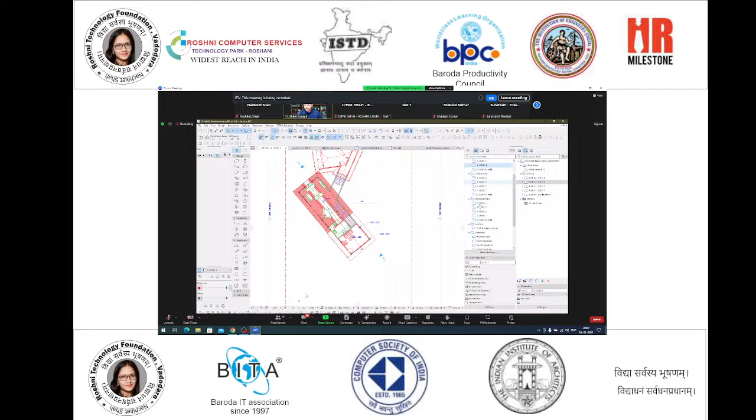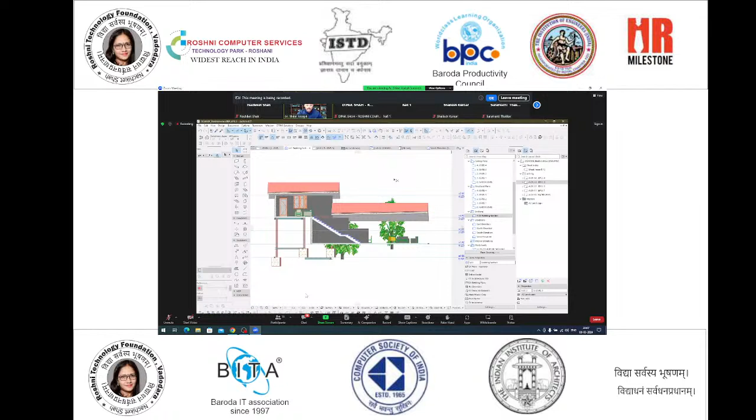If you see, there are so many drawings here, one of them is sections itself. If I go to the section, this is what we have, and you can see it is cutting through certain elements. So we can limit it to what all you want to see—we can turn on and off all the things you don't want to see and things like that.

And it keeps getting improved. You can see now I turned on the site layer, so in the section now we can see there are some mistakes—this is supposed to be down. So when I stretch it down, it automatically goes down and the column remains the same. So now work is getting really easier.

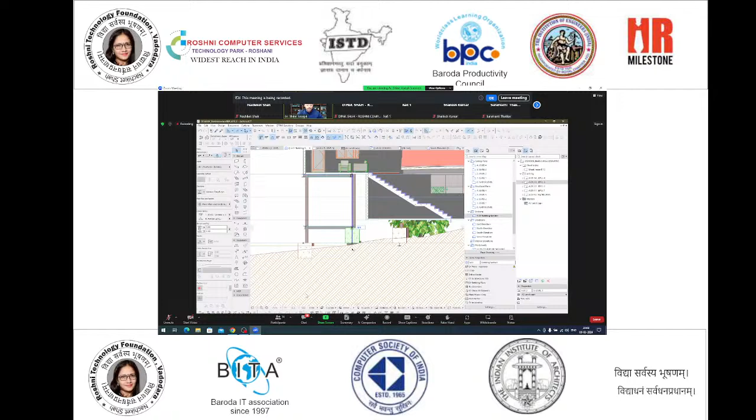Sorry for that. So it is getting like, I don't have to worry now about whether I'll make a mistake or not. I can see it in either 2D or 3D, anywhere I want, I can see the details. You can even see the open doors and the trees happening in front. If I need to just focus on the aesthetic part, for example if I need to see the texture as well, I can just change that, add a shadow, and that's it.

It is going to be a much better section in terms of presentation. Right now it is generating the section—I think you're understanding how easily we are taking that. We can see even the texture and everything changing. Let's say this wall suddenly decided to, instead of concrete block, go for a brick wall. So we can easily get a brick wall and get back the texture in 3D, in 2D, and anywhere we are doing it.

So this is what we changed in the 3D, and we got the same element here. The detailing can be of any scale. This is how easily we can create any type of drawing for our work.

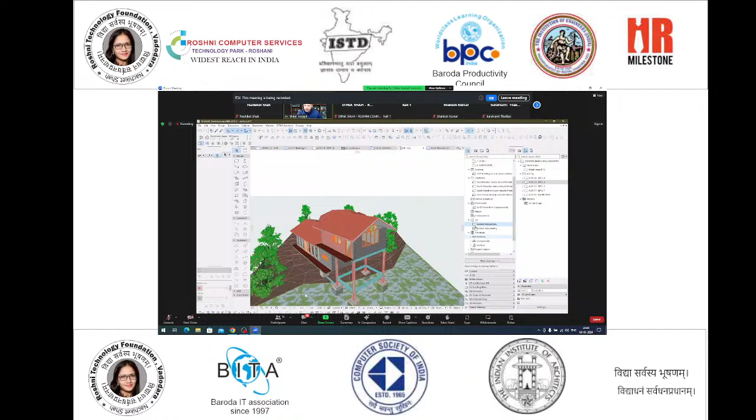An additional feature is that whenever we do any type of drawing, the software automatically generates the BOQ—not BOQ exactly, but schedules. There is a separate section itself in ArchiCAD called schedules, including element schedule. I'm going for wall schedule just to showcase how it generates. Right now it was a fresh model I had just added, and in this you can see all the IDs of the wall, how it looks, what is the material, the height, thickness, area, volume, and perimeter.

You have all the properties. Now some of the properties, let's say I don't want to have this, so I can easily remove the things that are not required. I can only focus on certain properties.

So now you will be able to see the improvised one. Each category is changed. Let's say I've decided I don't want to focus on the element ID at all. Once I remove that, it will focus only on the material type and the type. So there's one brick wall, 2.5-meter height, thickness is this much, area is this much, volume is this much, concrete blocks are here, which is also giving me the property of how much it is. So what I'm saying is that you're getting the property.

If I go for a door schedule, I'm getting the door schedule by default, so you have everything here. You can see all the door types used, including size, numbers, and everything. It is here, you can rearrange, re-edit how we want it. You can do calculations here, and add any type of properties.

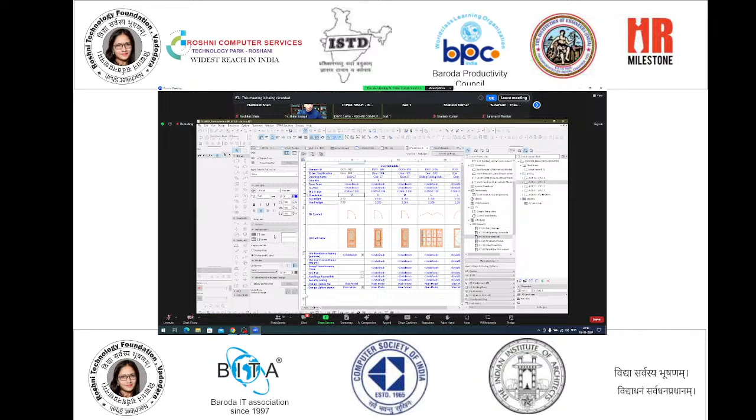So this product basically helps you. See, basically the only thing he created was the site, and from scratch he created a building, a wall, a roof, a railing, put structure components, put interior components into the drawing room, maybe kitchen, WC, everywhere. And you see that almost it is less than 1 hour time. He created the building, and this basically tells you how many walls.

Probably you can calculate the number of bricks. The moment you increase the size of the window, your wall size reduces and the number of bricks required reduces. It can also calculate the floor tiles required for each floor. So when you get the tiles, you can put the number of tiles floor-wise: first floor so many, second floor so many, third floor so many. Same way, the doors and windows tell you floor-wise how many doors and windows are required on each floor.

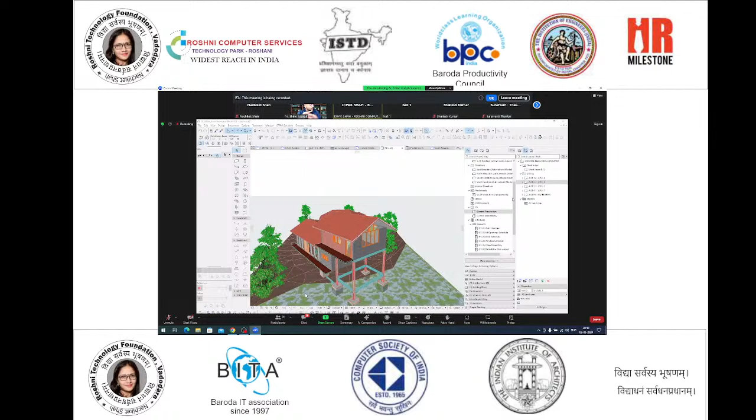So bill of material is beautiful, the drawing creation is beautiful, and probably you can export this drawing to AutoCAD and do further detailing into it. Some people question that you are slightly quick, and I understand that the task given was to complete it in 1 hour, so that was basically the time constraint, and instead of spending time explaining, he did it.